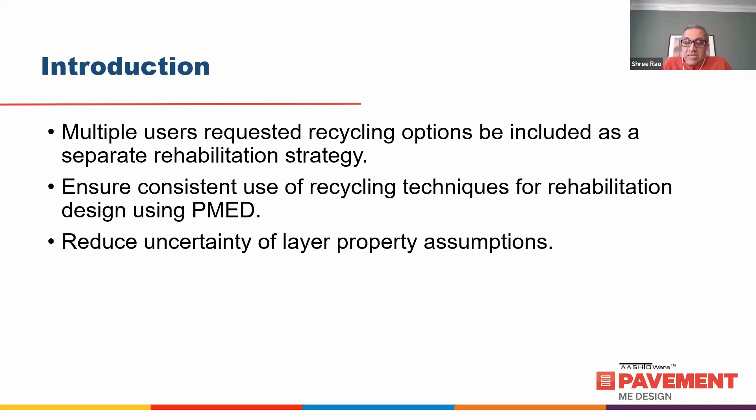As I mentioned, many users requested recycling options be included as a separate rehabilitation strategy, to ensure consistent usage of recycling techniques for rehabilitation design using Pavement ME Design. There were also some layer property assumptions needed. When designs are made with different recycling techniques, there are layer properties needed for those layers, and some agencies have that information while others don't. One purpose of this effort was to provide default layer properties for these recycling options. This will become clearer as I get into the rest of the presentation.

The objective of this 2024 enhancement—done very recently in the last fiscal year, as we just started fiscal year 2025 on July 1st, 2024—was to facilitate the use of recycling options that users can consider directly into the Pavement ME Design software for rehabilitation design.

We'll look at the recycling options and what exactly I mean by that in the next few slides. If you have an existing pavement, this could be a flexible pavement with or without an overlay, a rigid pavement with an asphalt overlay, or a rigid pavement without an asphalt overlay. These are the recycling options an agency could consider. The word recycling in this context means doing something with that existing layer, or at least a portion of it, or one or more existing pavement layers, and putting it back in place. That's how it differs from reconstruction.

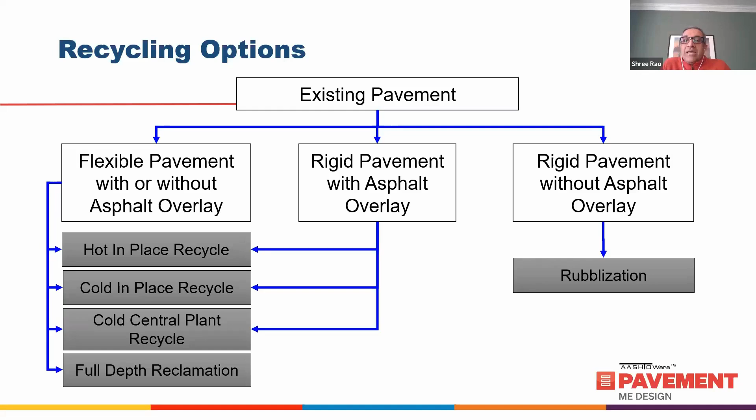So we are focused on this left part of the chart. We are not going to talk about the rigid pavement without asphalt overlay rubblization—this feature was in Pavement ME Design even before we introduced some of these recycling options, so that's not what I'm covering today. What I'm covering is a flexible pavement with or without an asphalt overlay, or even a rigid pavement with an asphalt overlay, and the different options for recycling this.

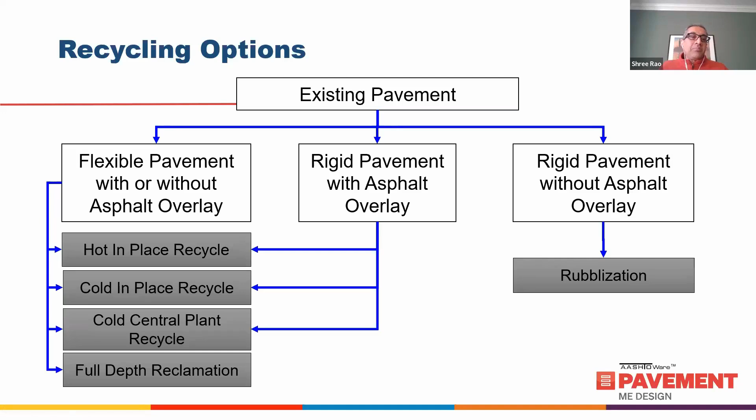You could have a hot in place recycle, a cold in place recycle, a cold central plant recycle. These first three are recycling options when you take portions of the top flexible layer. The last one, full depth reclamation, goes beyond the top asphalt layers into the subgrade or base layers themselves. That's why it's not an option for the rigid pavement with asphalt overlay—recycling that rigid pavement layer would essentially be reconstruction.

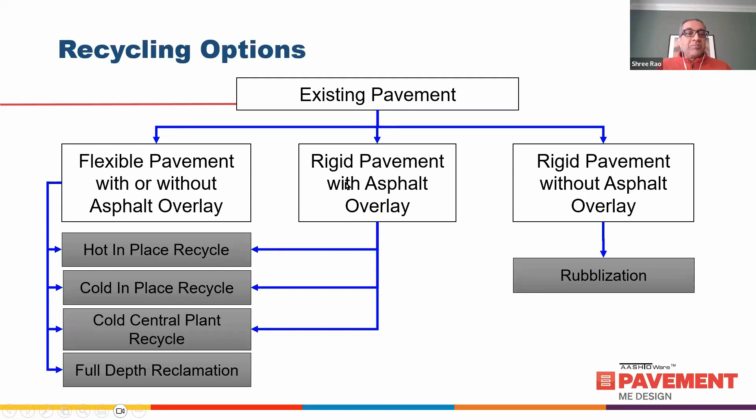Focusing on flexible pavements for the webinar today—when you have an existing pavement, these are the recycling options I'll show in more detail. This is a good summary slide, and my friends at Road Resource provided this information. They have a lot of good information on recycling, and some of the photos and slides in this presentation are provided by them.

If you have an existing pavement, you could do hot in place recycling, where you take off the top 1 to 3 inches of the asphalt layer and just the asphalt material itself, then overlay that with either a hot mix asphalt or a surface treatment. Cold in place recycling goes a little deeper, typically 3 to 5 inches, but not necessarily through the entire depth of the pavement—just the partial depth.

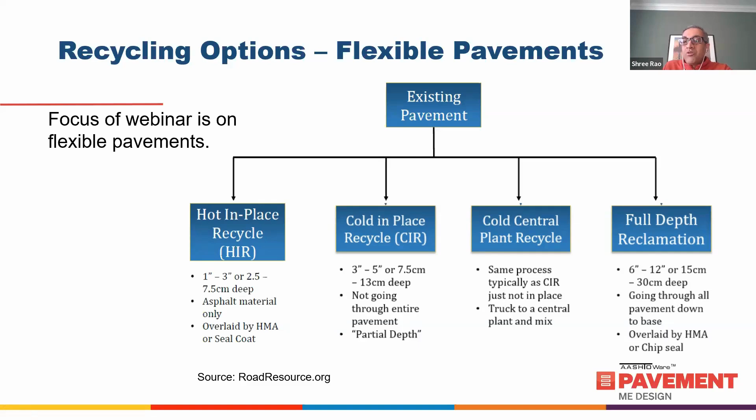Cold central plant recycling is very similar to cold in place recycling, except it's not done in place—you truck the material to a central plant, do some modifications, bring it back, and place it on the pavement. Finally, full depth reclamation goes through all the pavement layers down to the base, giving you a base layer over which you'd typically have an asphalt overlay, or for a low volume road, a surface treatment.

So we'll go into detail on each of these recycling design strategies. Let's start with hot in place recycling and how it's used in Pavement ME Design.

With each of these treatments, I have a few slides just to give some background for those who don't have experience with these recycling techniques. This background impacts how we decide how that pavement layer is actually modeled in Pavement ME Design.

With a hot in place recycler, you heat and then essentially mill a small amount of that pavement surface. You may improve the properties of that recycled layer, and then you place it back in place and compact.

It's typically considered whenever a mill and fill or leveling course is needed prior to placing an asphalt overlay, and typically used for asphalt surfaces that do not exhibit excessive structural distress. So you really have most of the asphalt layer in pretty good condition, with some surface distresses that you want to mill and put back in place—this is a good option for that.

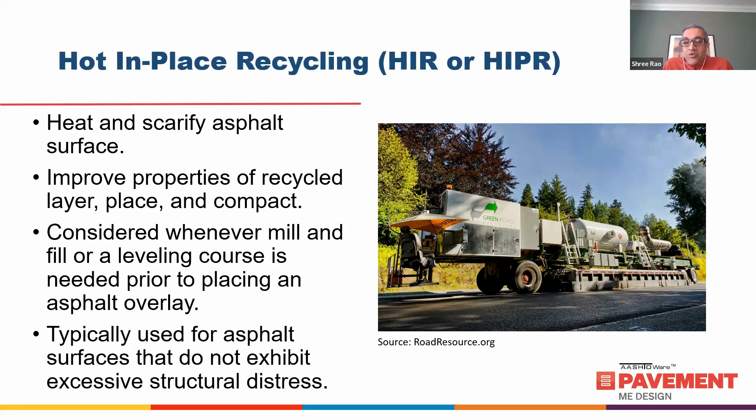As mentioned, you heat the top few inches of the asphalt pavement to soften it, and once softened, you scarify that material. You add any rejuvenators and additives to improve the quality of that material, mix and place the mixture, and then compact it. So essentially, the material you just milled is acting like a new asphalt overlay.

The rejuvenating agents could typically be some kind of oil, emulsion, or binder, and the primary purpose is to improve the durability or fatigue performance of that layer.

Typically you might add an HMA surface layer, or you may add some new aggregate to the mix to improve the gradation, so you have a good quality mix—particularly if you are not going to do an overlay on top of it and you're just going to do a surface treatment. You may add some new aggregate and additional bitumen to improve the quality of that mix. There are different ways this can actually be performed, many different options for doing hot-in-place recycling.

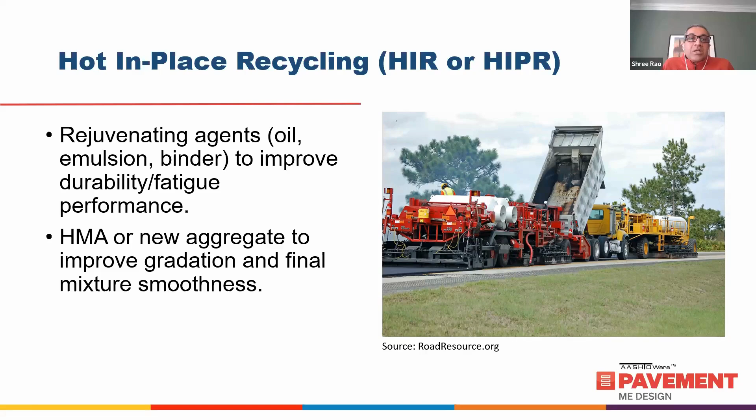You can have this process in single or multi-stage trains, depending on how deep you want the treatment. If you only go to a 1 or 2 inch depth, you would do a single hot-in-place recycling treatment. If you want significant depth, say up to 3 inches, you may want to do several layers—keeping in mind you're heating and scarifying an inch or so at a time.

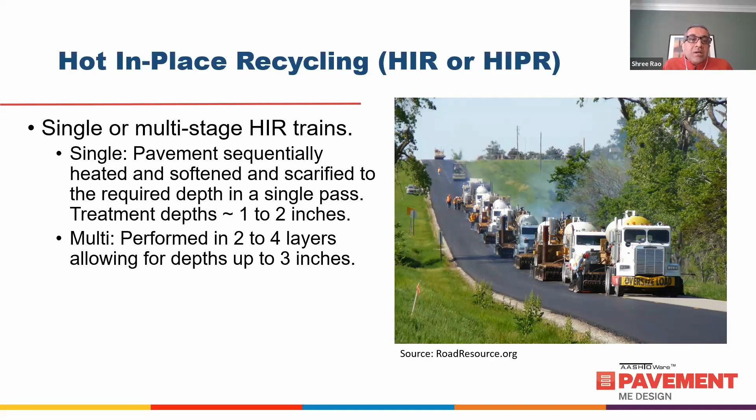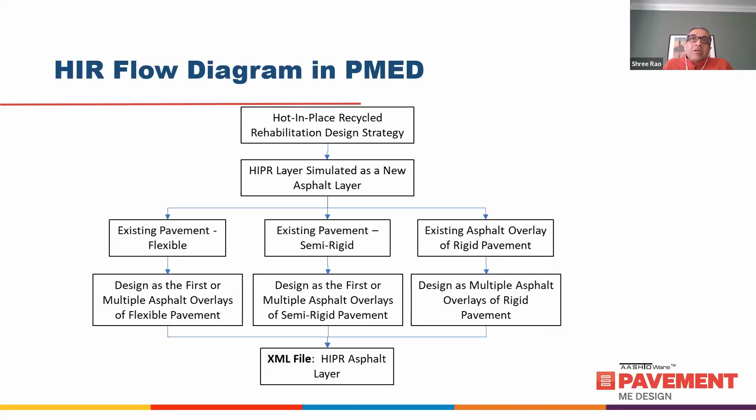So the flow diagram for the hot-in-place recycling strategy: as mentioned before, hot-in-place recycling is simulated as a new asphalt layer, because you're taking it out, adding material to it, and treating it almost as a new asphalt layer.

If you're treating it as a new asphalt layer, there are different conditions under which this is applicable. You could have an existing pavement that's flexible, an existing pavement that's semi-rigid—and recall, in Pavement ME Design, different calculations and models are used depending on whether the pavement is designed as flexible or semi-rigid. Or you could even do it on an asphalt overlay of a rigid pavement.

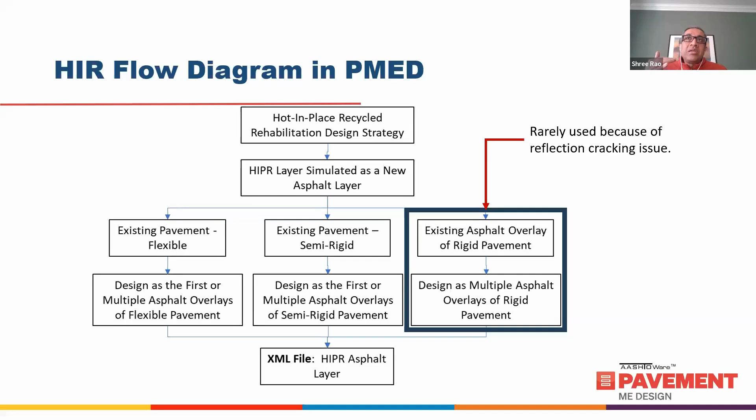Let me start with this last one first: it's rarely used because when you have an asphalt overlay of a rigid pavement, you could have reflection cracking. Hot-in-place recycling is really a surface treatment of the layer, but reflection cracking means you're having distresses in the lower portions of that asphalt layer. So it's rarely used in that situation.

So I'm going to focus on these two: the existing pavement flexible and the existing pavement semi-rigid. You have an existing pavement that's semi-rigid or flexible, and you're doing hot-in-place recycling.

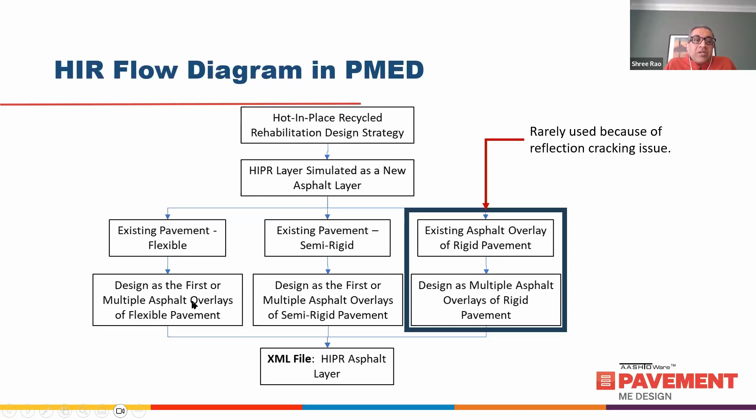So it's designed as the first or multiple asphalt overlays of flexible pavement. We are now going to treat this as an asphalt overlay, and then in the second case, we are going to treat this as an asphalt overlay of a semi-rigid pavement. So here's a little bit of a summary of that.

If you have a hot mix asphalt overlay or even an ultra thin bonded wearing course on top of your hot-in-place recycle, each of those layers are treated as an overlay layer, and the hot-in-place recycle layer is also treated as an overlay layer. So you have properties for those layers.

If you're not going to have an asphalt overlay and an ultra thin bonded wearing course, and you're just going to have the hot-in-place recycle layer and then have a thin surface treatment, a micro like a chip seal or a micro or slurry surfacing, or even just have the hot-in-place recycling as the wearing surface itself.

Again, some of these are low volume roads, so you may decide not to have a surface treatment. Pavement ME Design will still allow you to use this as a surface overlay layer. So in this top case, you have two different layers, the HIR layer and the hot mix overlay layer, and in this case, just the HIR layer.

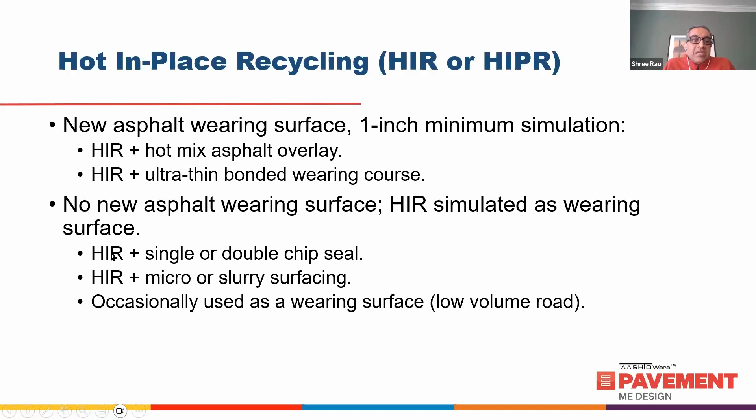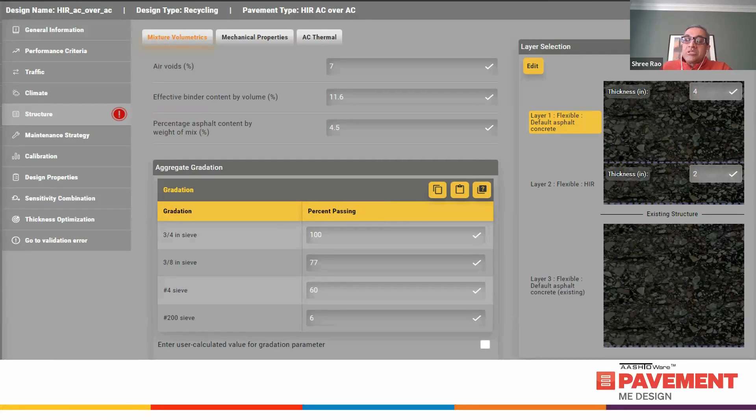And here are some screenshots. Once you've made the selection, for example, you see AC over AC, and you now have the pop up. Here's your existing structure, which is your layer 3, flexible default asphalt concrete. So this is your existing layer, and you've milled or hot-in-place recycled a portion of that, and that's this layer.

And then if you do choose to put an asphalt overlay, you can have an asphalt overlay as this layer. So this layer is treated as an asphalt overlay layer, and then this layer is also treated as an asphalt overlay layer, and this layer is treated as an existing structure. So we are using the asphalt overlay design procedure of an existing structure in this case.

As I mentioned before, you could actually delete this top layer and just have the hot-in-place recycling as your top layer. But if you choose not to do that and choose to have an asphalt overlay, then it will show these as your default layers. Obviously, you can change in Pavement ME the thickness of these individual layers, and you can also change the properties of these individual layers.

There are, when you select this option, this layer 2 hot-in-place recycle has default properties that are typical of a new asphalt overlay, or new asphalt material default properties.

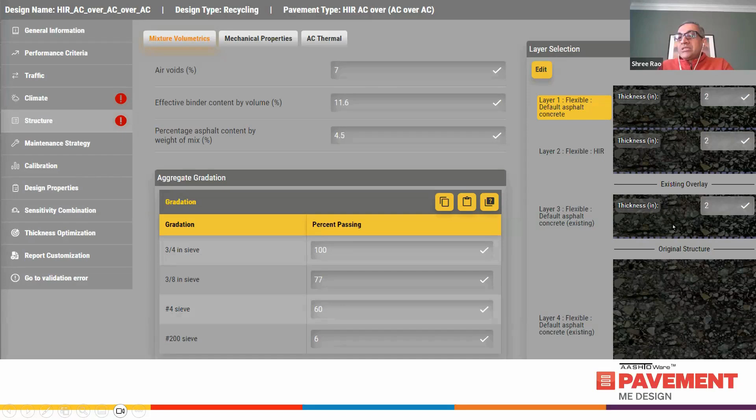So you'd have 2 inches here for the existing overlay, 2 inches here for the hot-in-place recycling, and then here's the new overlay that you would add on top of that. So you essentially are now adding 4 inches of overlay on top of your existing overlay and your original structure.

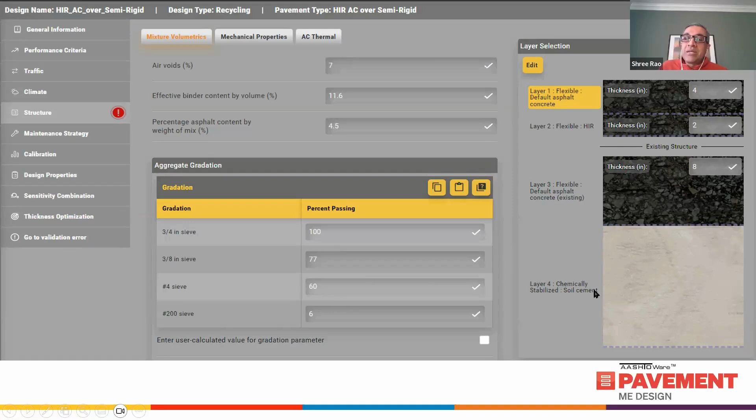Similarly, when you have a semi-rigid pavement, this is hot in place recycling of a semi-rigid pavement. If you recall, using a semi-rigid pavement uses slightly different modeling procedures. So this is your existing structure, which is a semi-rigid pavement. You have your existing asphalt concrete pavement and the chemically stabilized layer that makes it semi-rigid. If you hot in place recycle, say 2 inches of that, you have a 2-inch hot in place recycle layer, and then you add a 4-inch overlay. Again, these are default values. You can change the thickness depending on exactly what thicknesses you choose to have. And there are default properties for each of these layers.

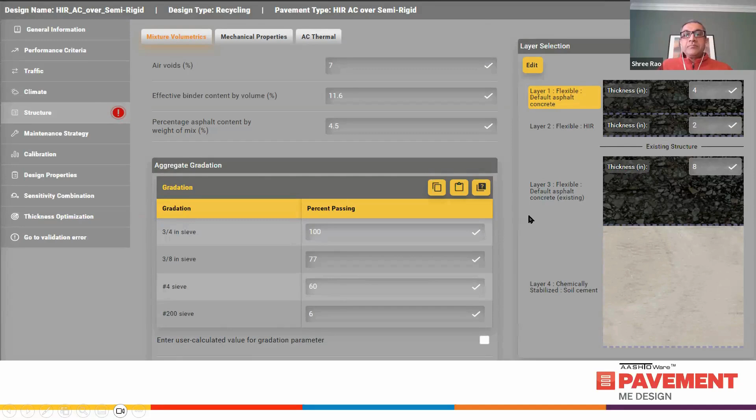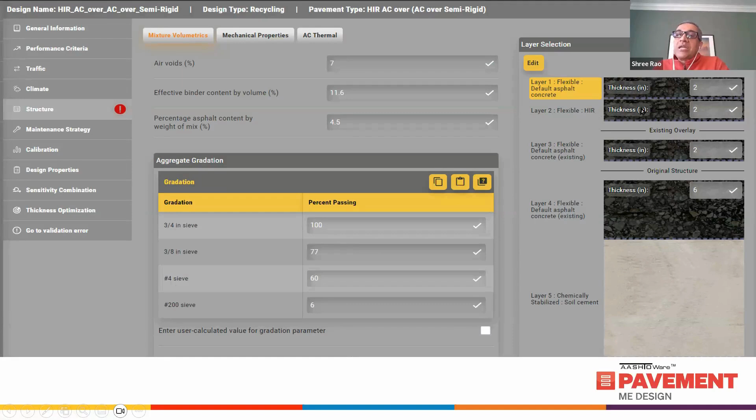Finally, the fourth case of hot in place recycling is when you do hot in place recycling of an overlay. So you have the semi-rigid pavement again, which is your existing asphalt concrete layer on top of your cement stabilized layer. Here's your existing overlay, from which you take a few inches and put that into hot in place recycling. So now you have a hot in place recycling layer and an overlay that you've added on top of that, which is the default asphalt concrete layer. Again, the hot in place recycle layer is assigned the same default properties as the asphalt concrete layer, which can be changed by the user.

So I think I mentioned this a couple of times: the properties used for the hot in place recycle layer are the input level 3 material property equations for dense graded asphalt mixtures, which are assumed to be applicable for the hot in place recycle layer. Because the dense graded asphalt mixture properties are used, the distress predictions are essentially the same as for asphalt mixtures that have the same aggregate, binder, and volumetric properties as a dense graded mixture. So you shouldn't see any difference if, for example, I just change this to 4 inches of asphalt concrete.

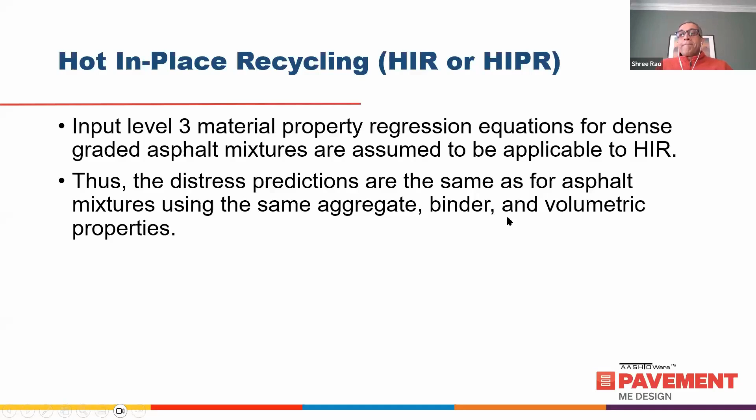Next we'll go into cold in place recycling and how that's used in Pavement ME Design. Hot in place recycling is a little simpler, simply because the hot in place recycle layer is treated like a new asphalt layer. That's really the main feature of hot in place recycling. But when we get into cold in place recycling and full depth reclamation, things change a little bit because we now have different categories or classes of this.

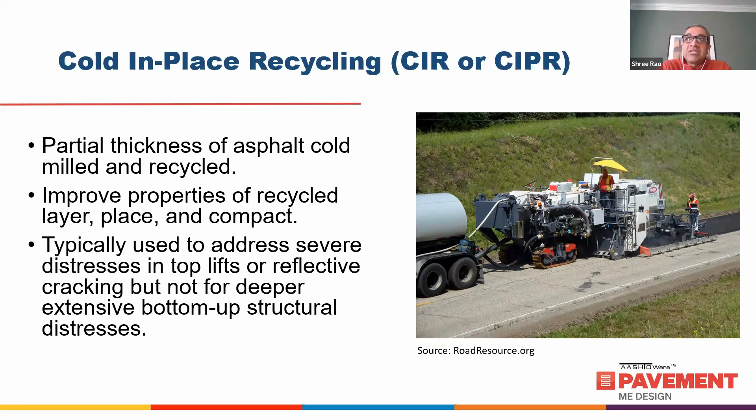So let me get into some of the details of cold in place recycling. As I mentioned earlier, cold in place recycling is a technique where you cold mill some of the asphalt layer, about 2 to 5 inches. Then you would improve the properties of that recycled layer, place it back in place, and compact it in place. It's a really good technique typically used to address severe distresses in the top lifts or even reflection cracking. But if you have significant structural issues, especially bottom-up cracking, it may not be suitable in that situation. For the most part, it's a really good technique that assumes you have decent structure in the lower part of the existing asphalt concrete.

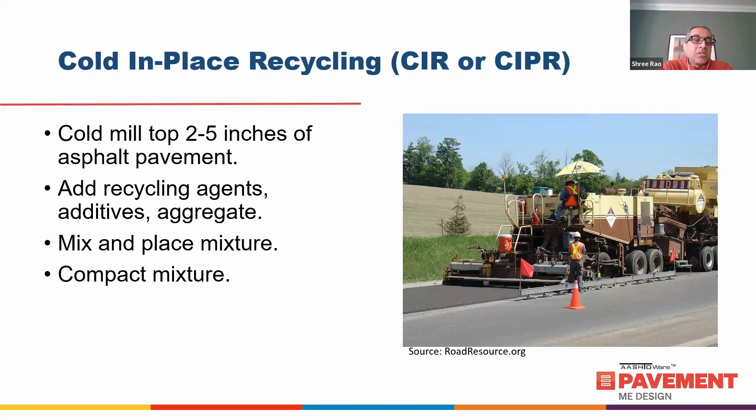So the process is: cold mill the top few inches of the asphalt pavement, add the recycling agents, additives, and aggregate. That second step is primarily to improve the quality of that layer, and improving the quality can mean a lot of different things to a lot of different people. You can improve it to a small extent or to a significant extent, depending on what you're going to do after that. That means if you're going to use it mostly as a base course, you may not substantially improve the quality of it. But if you're going to use it as a good quality pavement layer, you may want to add some additives and aggregate and so on. Once you do that, you mix and place the mixture, and then you compact it.

Many different agents are used for this purpose. You could have bituminous agents, foamed asphalt, emulsified asphalt. You could have many chemical additives, cement or lime, to add to this mixture, which can be used for some early strength gain and resistance to moisture damage. You could add new aggregate to improve the mixture properties before putting it back into place. So there are many different ways to improve the quality of this mixture before putting it in place. Again, this presentation isn't necessarily about the techniques, but I thought it would be good to show a few basic slides on this, just to give you an idea of what these are.

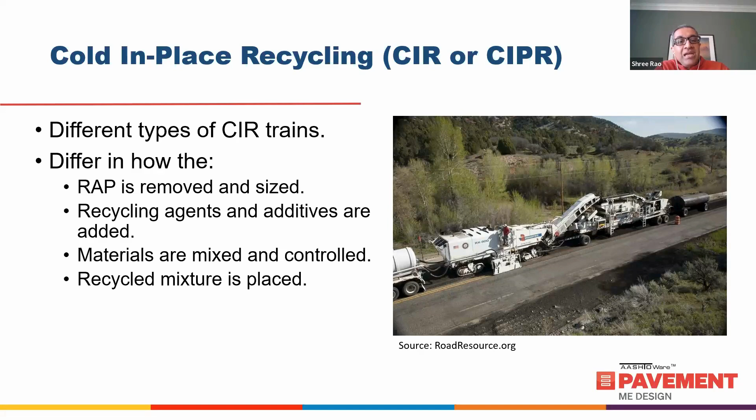Different types of cold in place recycling trains exist depending on what feature of that mixture is needed, and what quality you want. So you could remove the material, add the recycling agents, mix and control, and all of these will define the equipment that you would use to perform this treatment.

The recycle layer responds as a dense graded asphalt layer. This is a situation where you add bituminous material to the cold in place recycle, and you improve the quality of it to where it acts as a stiff layer. So it's simulated as a new asphalt layer in this situation because it has sufficient stiffness.

Depending on what material we use, this layer is treated as an existing flexible pavement, or depending on whether you have an existing flexible pavement or an existing semi-rigid pavement, it's designed as an asphalt overlay of a flexible pavement or an asphalt overlay of a semi-rigid pavement. So it depends on the situation, on what is the underlying layer and the existing pavement, whether it's flexible or semi-rigid. The models will choose the path for that. But the key is that your top layer, your cold in place recycle layer, is treated as a flexible pavement layer or a new asphalt layer.

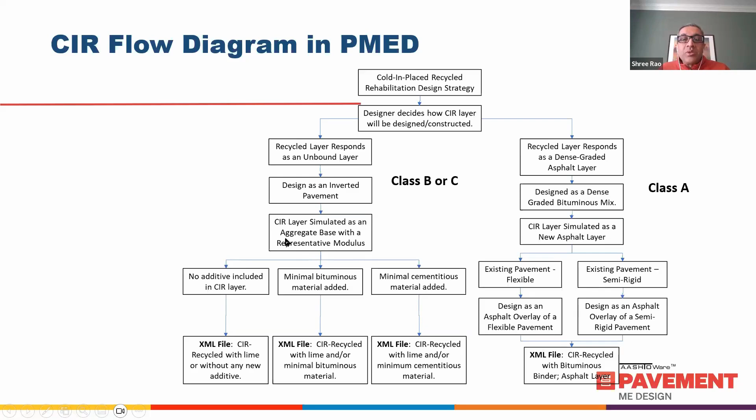Here the cold in place layer is simulated as an aggregate base. So that's the main difference. The difference between the right side and the left side is how that layer is treated, whether it's treated as a new asphalt layer or whether it is treated as an aggregate base.

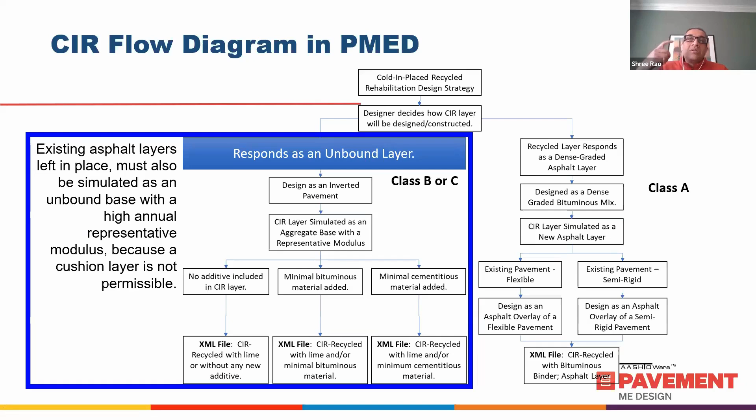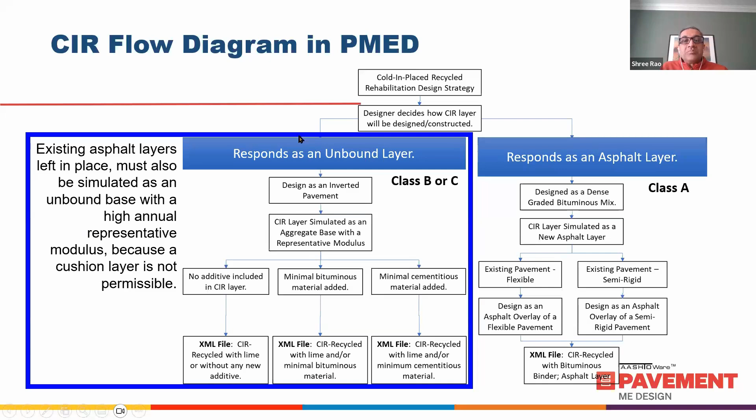So here's the tricky part of this. Because in Pavement ME Design, we can't have a cushion layer, the model for the existing asphalt layer - the layers beneath the cold in place recycle layer in this case - is also simulated as an unbound layer with a high modulus, because we don't want to have a treated layer, then a granular layer, then a treated layer underneath it. So the layer underneath it is treated as an unbound base with a high modulus. This responds as an unbound layer, and here it responds as an asphalt layer.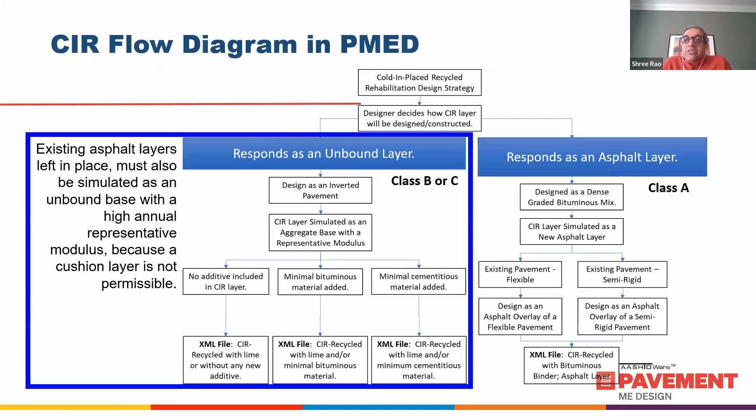So Pavement ME Design allows for different options here. Cold in place recycle with Class A is designed and constructed as a dense graded layer. Class A is when there's sufficient binder or additives added to the CIR layer, so it responds as a bound layer. It has tensile or flexural strength that will resist tensile stresses or strains. This summarizes what I've been saying: in this situation, it responds as an asphalt layer. The only difference between A1 and A2 is when the stabilization material is emulsified or foamed asphalt, different default properties are entered, and when the stabilization material is cementitious, different default properties are provided.

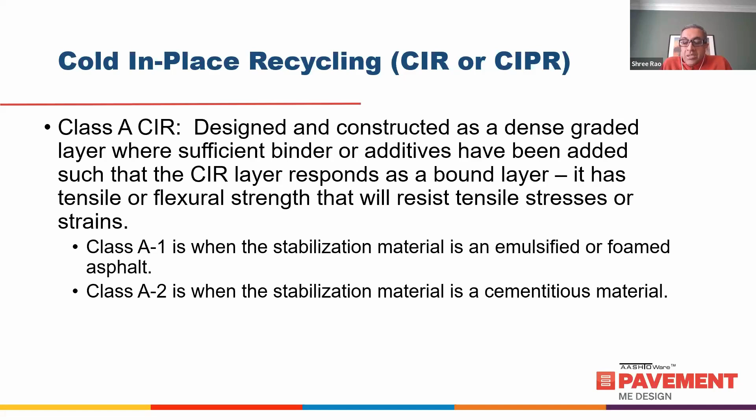Class B, on the other hand, has only a minimum amount of stabilizer material added, so it responds as an unbound aggregate layer. In the modeling, it's modeled as an unbound aggregate layer with a representative annual resilient modulus.

I mentioned this before, but it's worth repeating: there are default values included for this, but a user who has better test data or better values for their agency can change those values for their design purposes, otherwise they use the default inputs. If you select a Class B cold in place recycle, the default values will be loaded for that layer.

Finally, Class C is where no additional stabilizer material is added, so the layer responds as an unbound aggregate layer. In this case, the resilient modulus is dependent on water content that changes over time. So the difference between Class B and Class C is that Class C modulus changes with the moisture content of that layer, versus Class B, where it's essentially kept fixed over time.

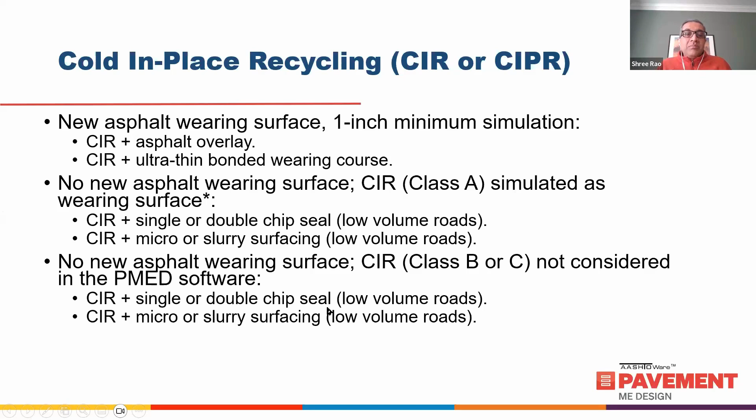So this last option - I don't know if anybody actually does a cold in place recycled Class B or C with just a thin surface like a chip seal or a micro surface on top - but that's not allowed in Pavement ME Design.

As I mentioned, in most cases of cold in place recycling, an asphalt overlay is placed above a Class A cold in place recycling layer, but you can remove that overlay and still run the design with the CIR layer as the top layer.

Asphalt overlay above Class B and C are needed. If you have Class B or Class C, you do need the asphalt overlay on top of that in order to run the design.

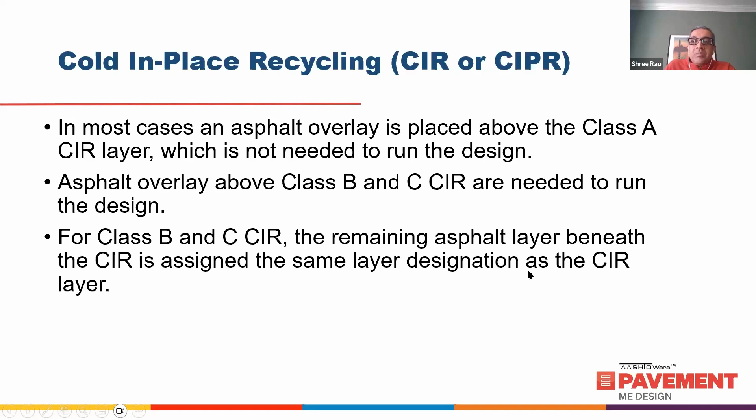However, when you use Class B and Class C, keep in mind that we cannot model a sandwich layer. So the remaining asphalt layer beneath any existing asphalt layer that you do not mill and cold in place recycle is assigned the same layer designation as the cold in place recycle layer.

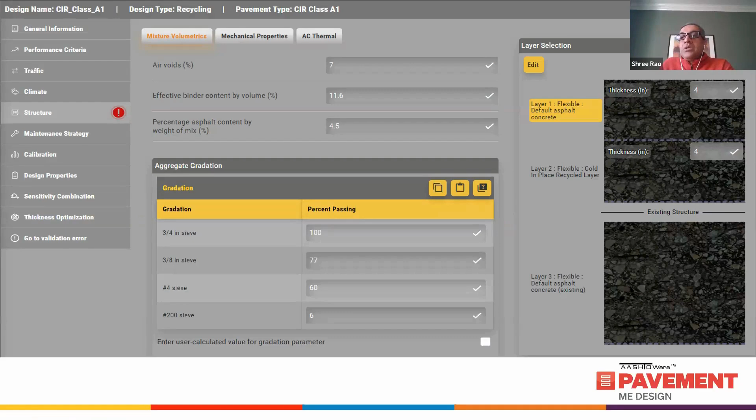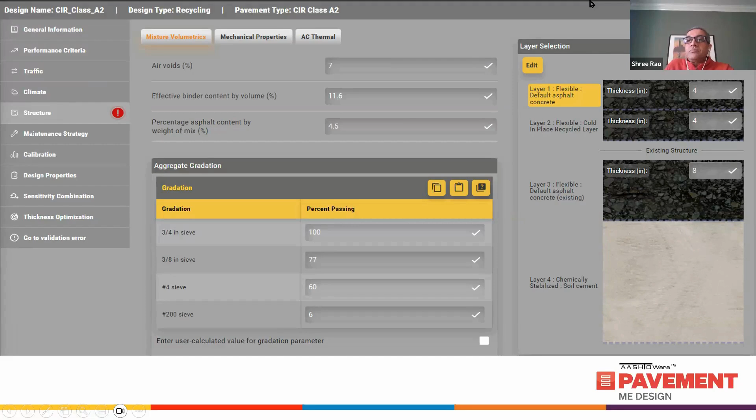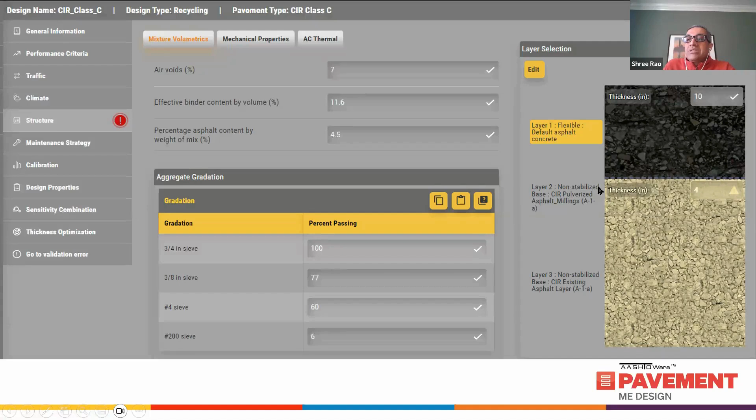Here's the Class C for cold in place recycle. Here's the overlay that you've placed on top of the cold in place recycling layer, and here's the existing layer, the cold in place recycle. It's modeled as - this is the existing asphalt pavement - but as I mentioned before, it is modeled as the cold in place recycled layer because we cannot have a sandwich layer.

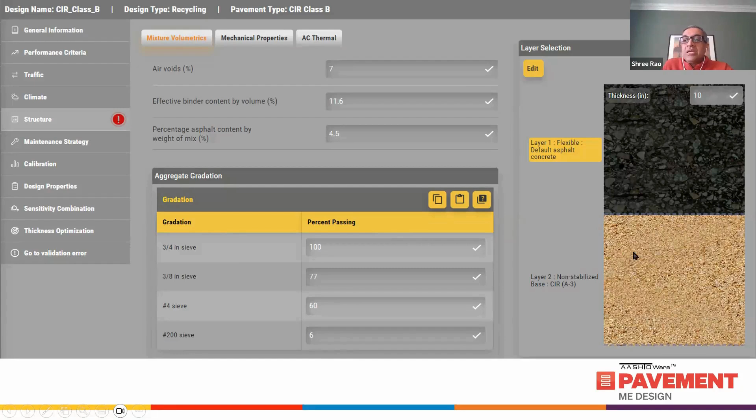And here's the cold in place, Class C, and here's the cold in place Class B. You have the cold in place recycle layer that's treated as a non-stabilized base, and the overlay is added on top of this. So this is how the whole layer is treated as a non-stabilized base.

So here's some design runs that Harold did, and give credit to Harold for running a lot of these design runs and developing these protocols for the cold in place recycling, the full depth reclamation, and the hot in place recycling.

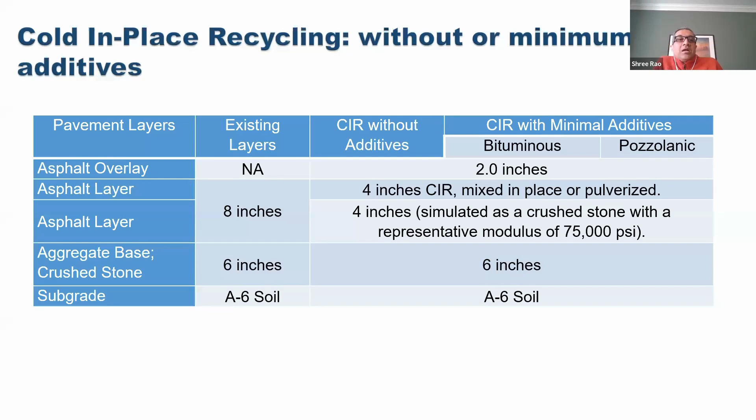This is just an example. Individual cases will be different, but the next few slides show an example run. Here you have an 8-inch asphalt layer over a 6-inch crushed stone base and subgrade soil of A6. You have cold in place recycle without additives, and cold in place recycle with additives, either bituminous or pozzolanic additives. 2-inch asphalt layer, 4-inch cold in place recycle mixed in place, on top of the existing 4-inch layer. As mentioned before, this is modeled as a crushed stone with a representative modulus of 75,000 psi in this case, and then here's your crushed stone.

So let me start with the rutting. The baseline design has this level. If you don't have any additives, you have a higher level of rutting. If you have a minimum amount of additives, the bituminous additive, you have this level of rutting. And if you have pozzolanic additives, it's a little better.

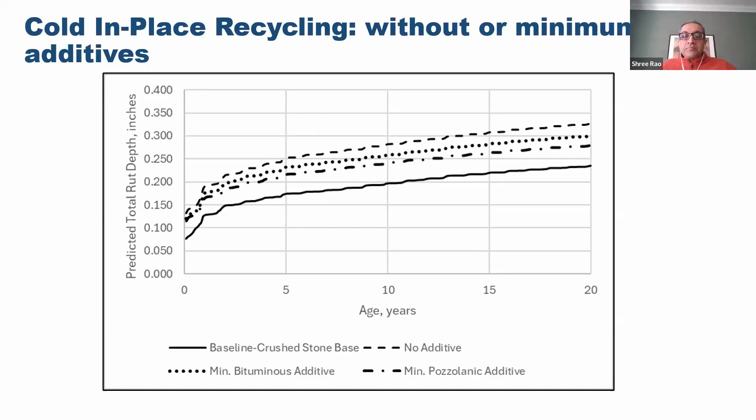The bottom up fatigue cracking: again, if you have no additive, there's quite a bit more bottom up fatigue cracking. But if you have some amount of additive in the cold in place recycling, in this case the bottom up fatigue cracking was pretty low.

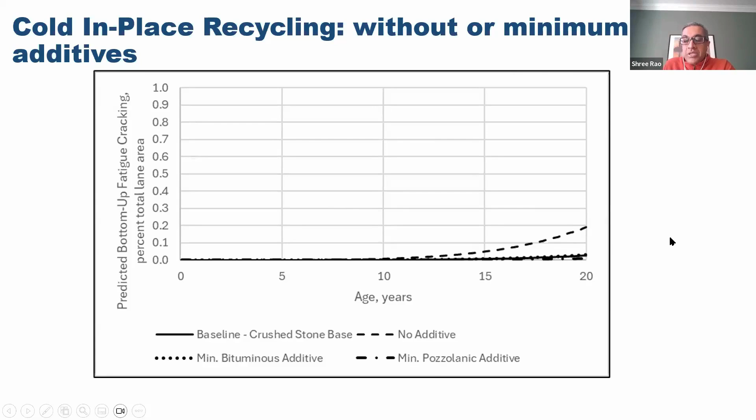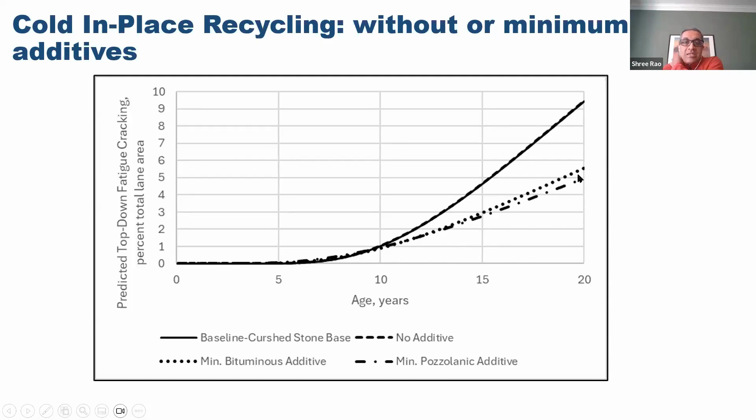Top down fatigue cracking: the baseline crushed stone base and the no additive case had more top down fatigue cracking. With the bituminous additive, the amount of fatigue cracking is reduced by about half in this case.

Typically, cold in place recycling is done with an additive. So the last example was just without additives. Essentially, cold in place recycling without additive is treated as a granular layer. With an additive, it is treated as a flexible layer. So again, comparing essentially a new pavement design with a cold in place bituminous additive and a 2-inch asphalt overlay.

For this case you have 4 inches of cold in place and 4 inches of existing asphalt layer, and 6 inches, and an A6 soil.

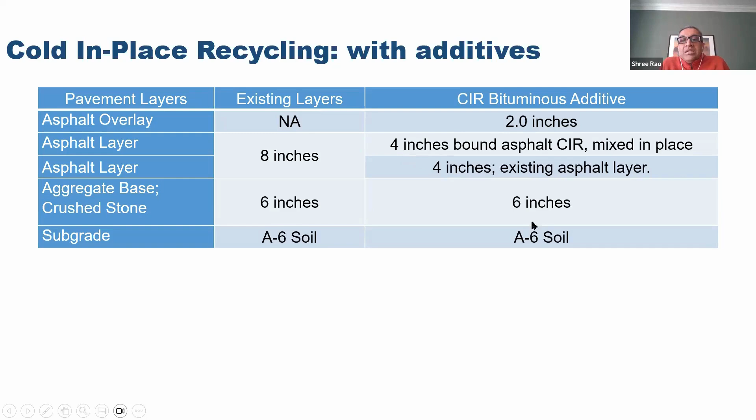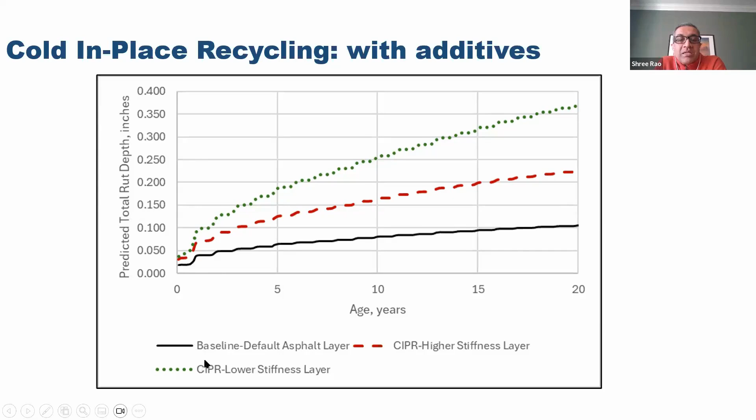So the default asphalt layer, this new design, has a rut depth of about 0.1. Depending on the stiffness of the cold in place recycle layer, if it's a high stiffness layer, you have rutting of about 0.2, and when the cold in place recycle layer has a lower stiffness, you have a higher amount of rutting. So depending on how much additive you use, you can have different levels of rutting.

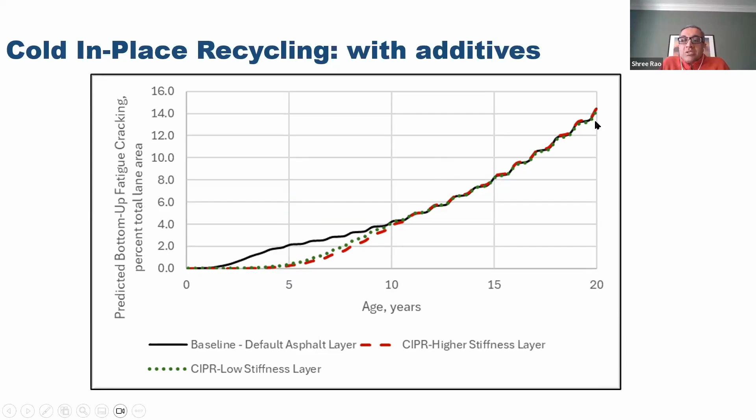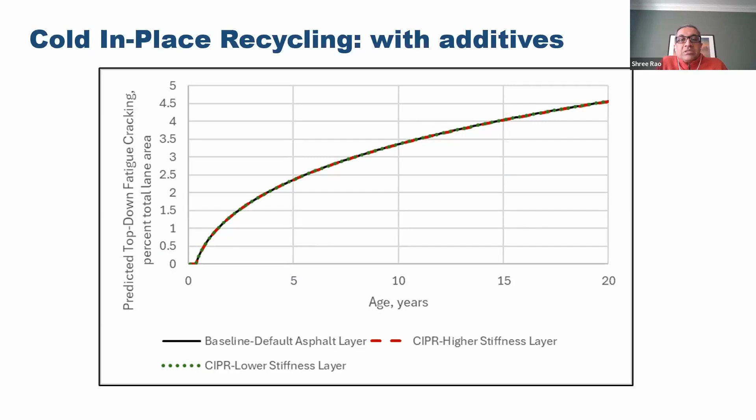Here's the bottom-up fatigue cracking model. Again, there's not that much difference between these three on this domain for any of the different layers, so they are about the same at age 20. And the same thing with the top-down fatigue cracking. So rutting was the only major difference here when additives are used.

So that was cold-in-place recycling. Let me get into full depth reclamation and how it's used in Pavement ME Design. Full depth reclamation is a situation where the entire thickness of the asphalt is pulverized and combined with most of the underlying layers, essentially creating a stabilized base layer.

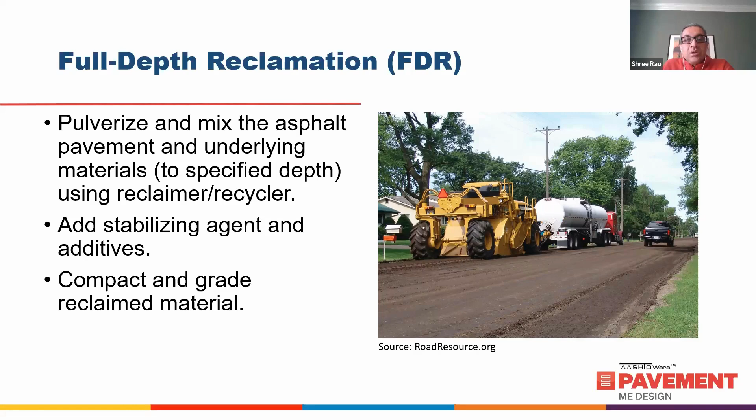Depending on how much binder or additive is used, the properties of that layer can change. It's very similar to what we discussed with cold-in-place recycling, and it's typically used when your flexible pavement has extensive structural distress. So you're recycling pretty much the entire asphalt layer, including some of the base layers, in place. You pulverize and mix the asphalt materials and some of the underlying materials using a reclaimer or recycler, add a stabilizing agent and additives, then compact and grade the material. So you've created essentially a new base course over which you place the asphalt overlay.

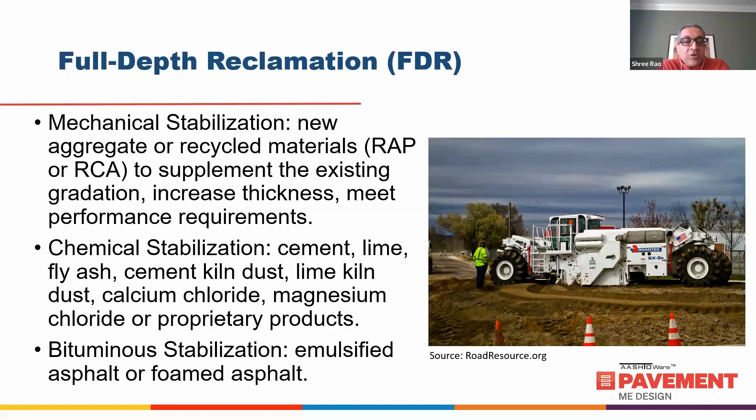You could do different types of stabilization of that layer, add new aggregate or RAP or other recycled aggregate, and change the gradation. You could increase the thickness of this layer or do certain things to meet performance requirements. You could have different types of stabilization, chemical stabilization. There's a whole host of chemicals that can be used in full depth reclamation, or you could also use emulsified asphalt or foamed asphalt to stabilize this layer. So there's many different options available.

Very similar to the cold-in-place recycling, the full depth reclamation rehabilitation strategy, again, depending on whether that recycled layer is present, the designer has to choose how this layer will be constructed. We have the same options, A1, A2, B, and C for defaults. The B and C is where the recycled layer responds as an unbound layer, and the A1 and A2 is where the recycled layer responds as a bound layer.

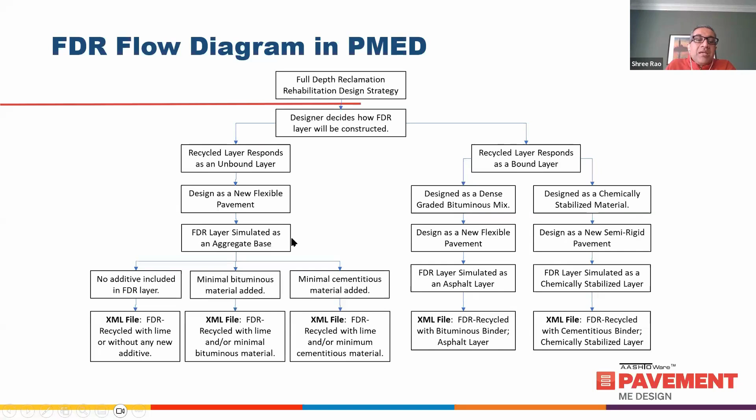So it's designed as a dense graded bituminous mix, or a chemically stabilized material. If it's a chemically stabilized material, it's designed as a new semi-rigid pavement. If it's bituminous material, it's designed as a new flexible pavement. The full depth reclamation layer is simulated as an asphalt layer in this case, or simulated as a chemically stabilized layer in this case. If it's unbound, the FDR is designed as a new flexible pavement, and the FDR layer itself is simulated as an aggregate layer. Depending on whether there's additives included, and the properties of that additive, that FDR layer is a little different.

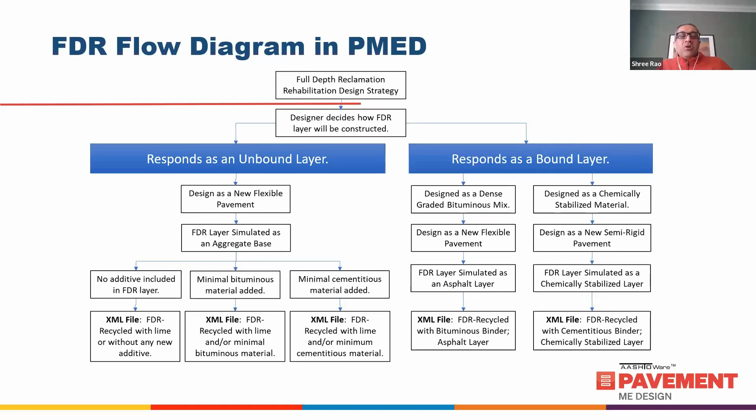So some of this is very similar to the cold-in-place recycle, whether it responds as an unbound layer or a bound layer. You will always have an asphalt wearing course for a full depth reclamation, so you have to have at least 1 inch for the simulation. So you have full depth reclamation plus asphalt overlay. As I mentioned, the full depth reclamation or an ultra thin bonded wearing course you would have as the surface layer. If you don't have a wearing course, full depth reclamation is not considered in the Pavement ME Design software.

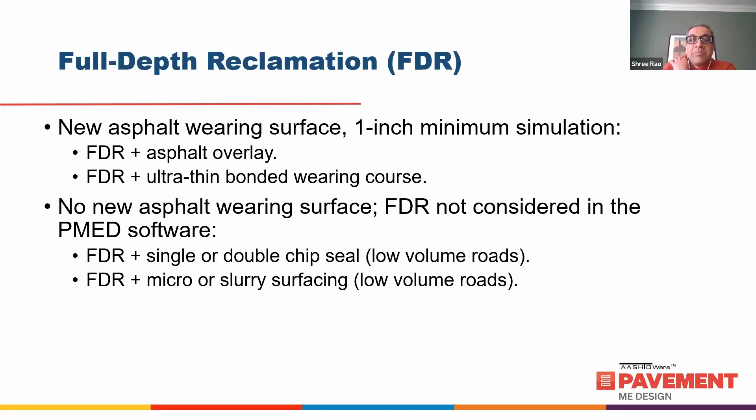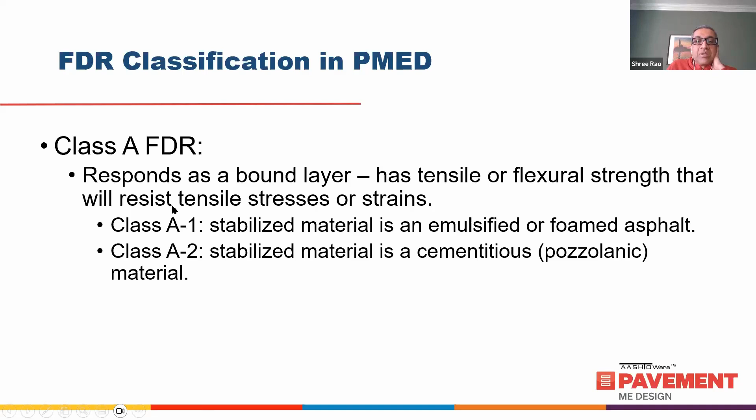Similar to the cold in place recycle, Class A full depth reclamation responds as a bound layer. When I say bound layer, it means it has tensile or flexural strength to resist tensile stresses or strains, and so it depends on whether it is asphalt stabilized Class A1 or cementitious stabilized Class A2. Class B is when you have a minimum amount of additive added, so it does increase the modulus a little bit, but it does not have enough strength to resist the tensile stresses or strains, and so it responds as an unbound layer. But because it has a reasonable level of stiffness, it acts as a good quality base material with a representative annual resilient modulus. Finally, Class C is no additive or binder added, so really it acts almost as a high quality subgrade layer or granular layer, and it responds as such with the resilient modulus dependent on water content that changes over time as modeled using the climatic model included in the software.

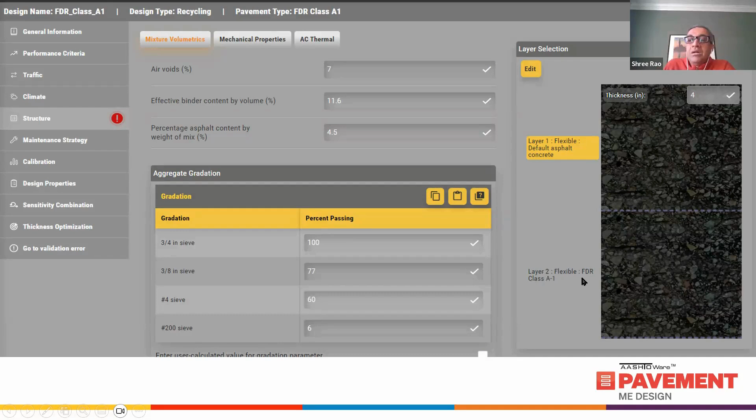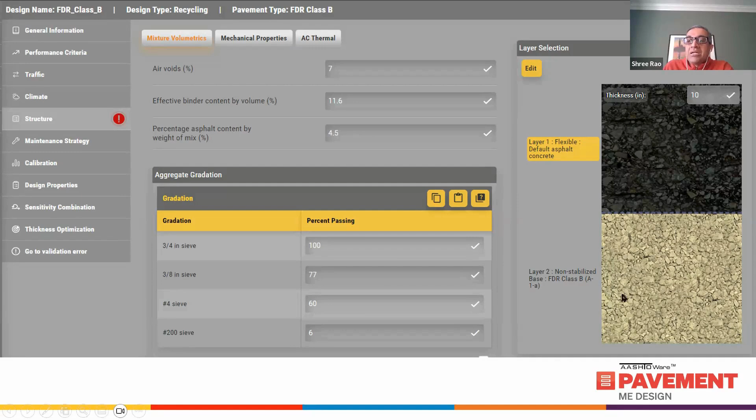So here's your new asphalt overlay that you add on top of the full depth reclamation. This is Class A1, so the default properties are that of a bituminous layer. Here is full depth reclamation with Class A2, so the default properties are that of a chemically stabilized layer, and the modeling then uses the chemically stabilized modeling. Class B is, again, a non-stabilized base, and the full depth reclamation for Class B is, as I mentioned before, you have your asphalt overlay, and then it's treated as a granular layer with a high modulus. Finally, Class C is treated as a granular layer, but the modulus of this is also pretty high, but it will change with the water content in that layer.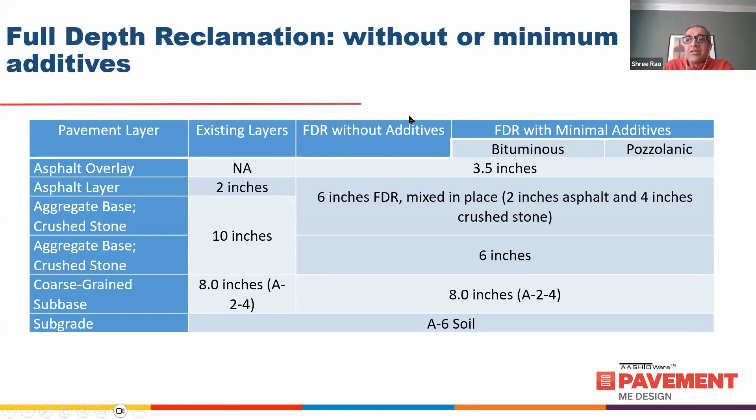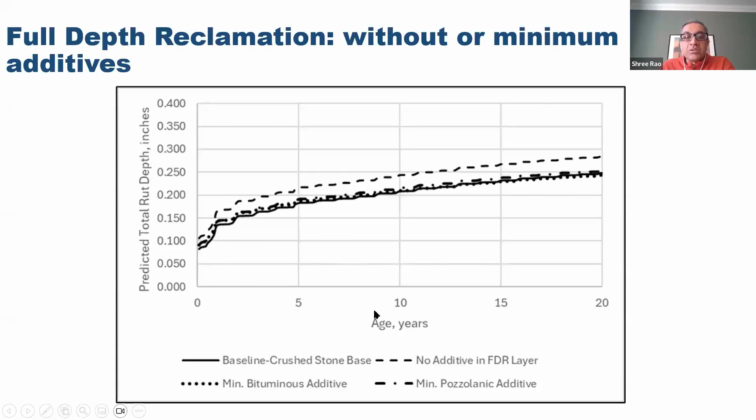As I mentioned before, without additives, the full depth reclamation layer is modeled as a granular layer. So here's the results for rutting. The baseline crushed stone base has a little bit lower rutting, and when you have no additive in the full depth reclamation layer, it has a little bit more rutting at 20 years. When you have some additives, bituminous or cementitious, it's kind of comparable to this baseline design case.

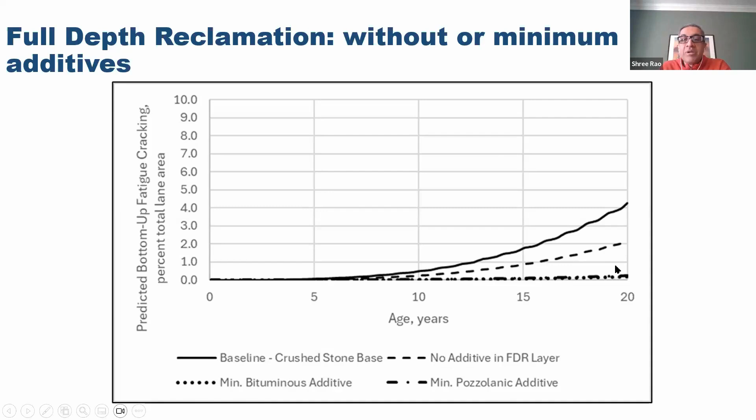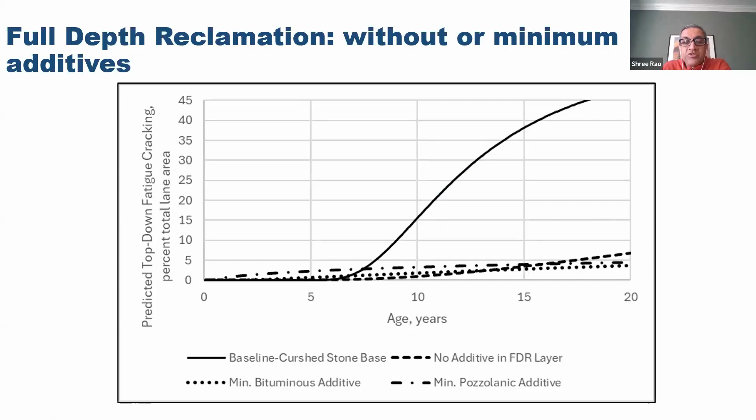Likewise, for bottom-up fatigue cracking, here's the baseline crushed stone. In this case, the baseline has a little bit more bottom-up cracking compared to the full depth reclamation layer. When you add the bituminous additive or the cementitious additive, the bottom-up cracking is pretty small in this case. The top-down cracking is pretty high for the baseline case, but for the additives case and the full depth reclamation case, the top-down cracking is lower.

Like I mentioned before, when there's no additives used, the full depth reclamation is simulated as an unbound layer, and the resilient modulus is dependent on the degree of saturation as predicted by the Pavement ME Design software. So you can see that the modulus is changing over time, seasonally, for this layer.

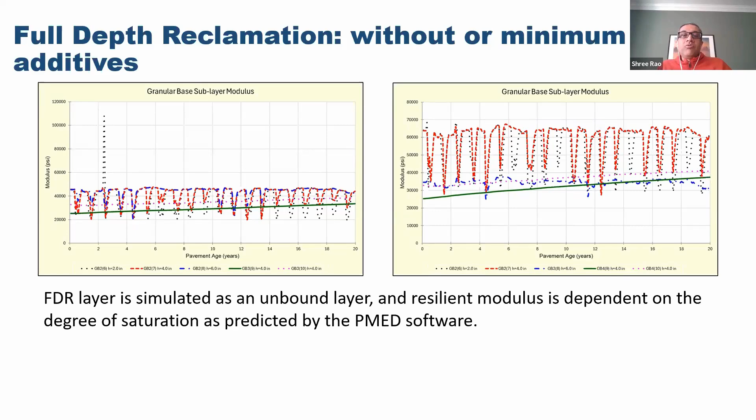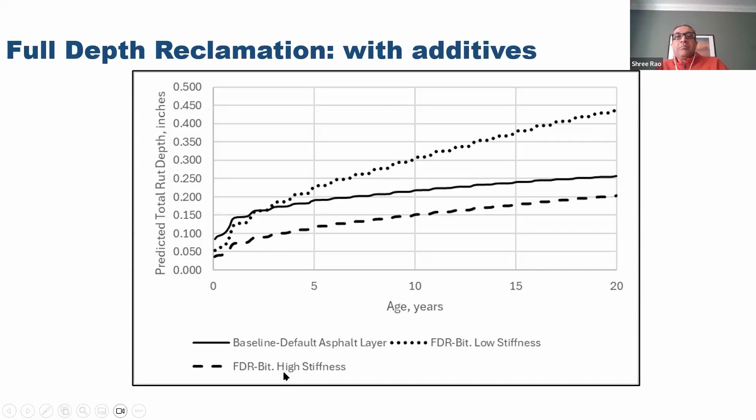So the baseline model shows a level of rutting of about 0.25 inches. With the low stiffness, we have a little bit higher rut depth, and then if you change the stiffness to a high stiffness bitumen, that rutting drops down.

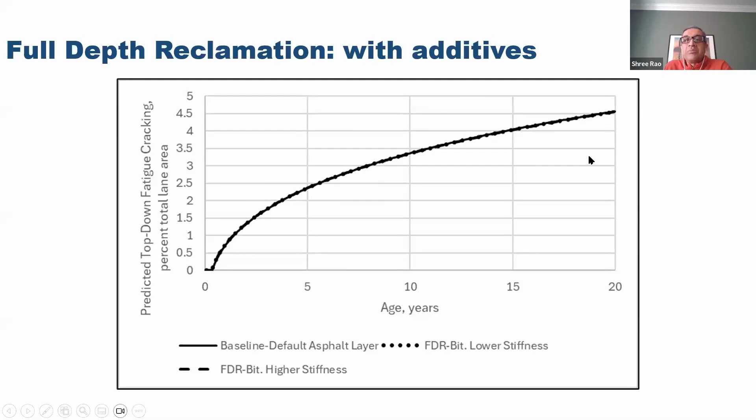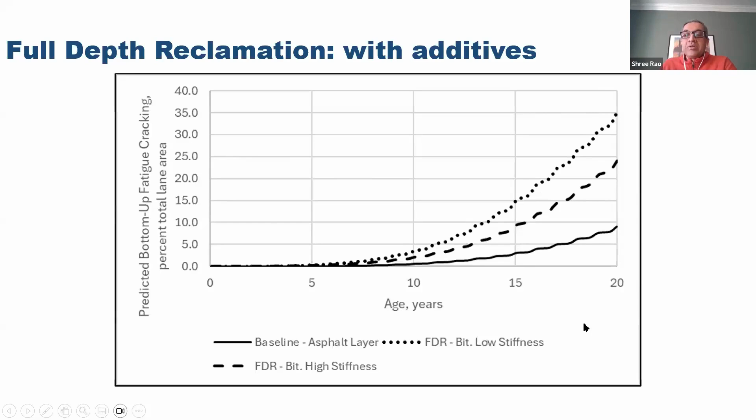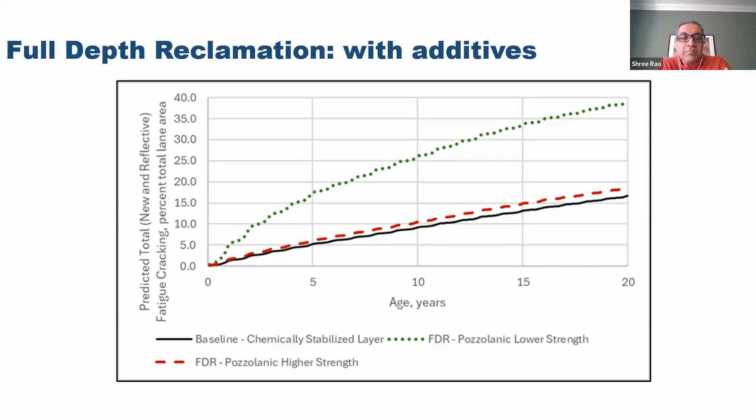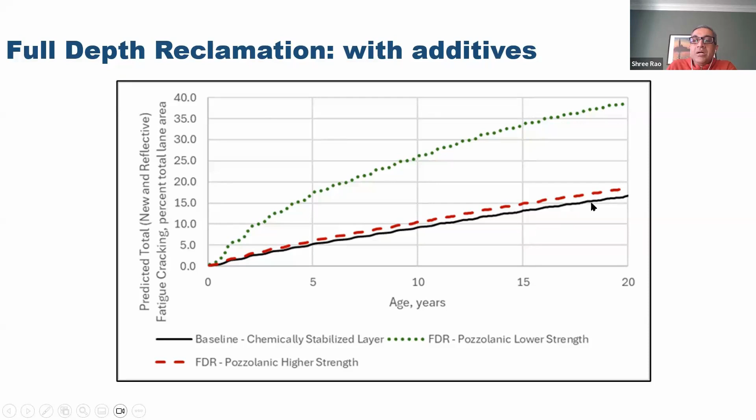So the total, which is the new and reflective fatigue cracking, here's the baseline case, and for this is the chemically stabilized example. So when you have the chemically stabilized layer, we have some reflection cracking and some fatigue cracking. That total cracking for the baseline case is lower. When you have a lower strength cementitious material, you have a higher level of cracking, and then if you have a higher strength cementitious material, you can match the baseline cement stabilized layer design.

So just a quick summary of this process. The Pavement ME Design now has new recycling strategies, which are hot in place recycling, cold in place recycling, and full depth reclamation incorporated into Pavement ME Design. The analysis path taken by Pavement ME Design depends on the layer types and the strategies, including the amount and type of additives.

So as I mentioned before, depending on whether you do class A or A1 or A2 or B or C, there are different default values that are provided in Pavement ME Design, but also the analysis path taken within Pavement ME Design is different. Because the analysis paths are different, the calibration coefficients are different for these different paths. So now the user does not have to think about which option to choose while selecting a recycling strategy, and you can choose the built-in HIR, CIR, FDR options and use that as you're performing your recycling overlay design.

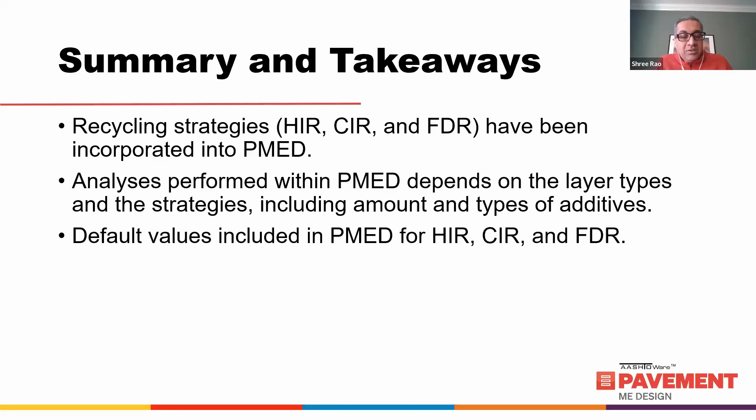So that's all I had for the presentation. I'm sorry I could not catch all of that, all of the Q&A, but we'll get to that in a little bit.

Ben, did you say you wanted to do the second poll? Yes, I'll launch it. Okay.